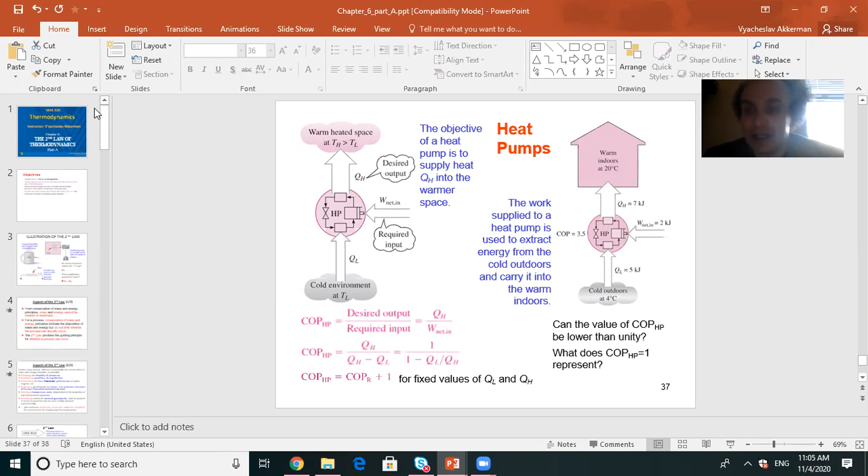Anyway, we are at second law, and I know this time, this homework, we spend a lot of time of theoretical and philosophical questions, but it's important. I do want you to understand what second law is, how it looks like, because first it looks like not very nice, not very convenient. But if you understand it, if you will be able to dive deeply in this, everything will be easy and self-consistent. Please realize it, okay?

So that we started. Last time we introduced second law, and I told you there are many ways how you can deal with it. Please realize second law is something in between juridical and physical law, right? It's something that you may not but won't violate. And I tell you how you can consider it. This law has never been proved, right? It has never been proved

experimentally or theoretically, but you know it exists. It's empirical fact, and you know if it would not work, nothing we talk about here would work in that case. So that's you may believe in it. And I told you how you can consider it. That when you are young, when you are children, people tell you don't do something and you don't do.

And ancient Greeks, whom I recall all the time, assumed that you cannot do something that gods or nature does not want to do. They assume that you cannot do what power cycle and refrigeration cycle do. They assume that you cannot convert heat into work. They assume that you cannot transfer heat from cold to hot source. They assume it's prohibited. That's a law.

But when you grew up, how our civilization grew up, you say, okay, I want to violate this. That's what nature desires, but I do want to do something that is not desired by the nature. People say, we do want to convert heat into work. We do want to transfer heat from cold to hot source, right? We do want this. And actually all our thermodynamics, all our industry and manufacturing is based on this. We say, we want this.

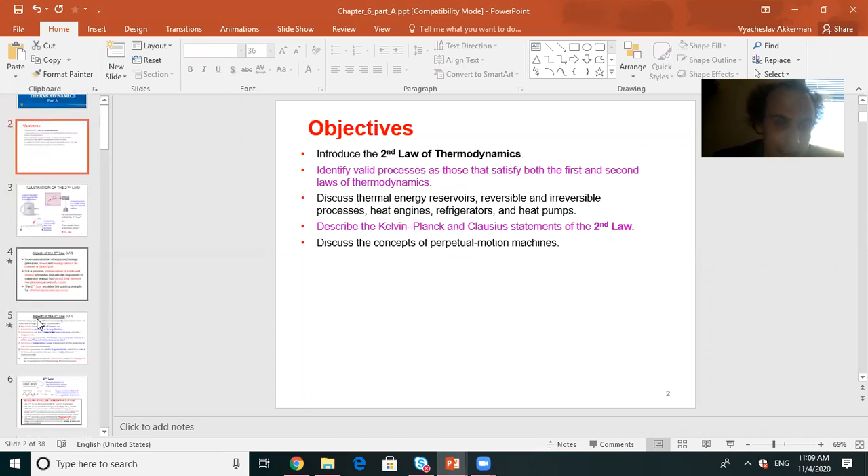Okay, let me continue. Do you see my screen, I believe? So far we considered two statements of the second law and demonstrated their equivalence, right? What are these statements? What we did last time — we introduced the concept and discussed different aspects. We say that the second law works only together with the first law. If the first law does not work, the second law does not work either, and there is no reason to consider it. In your homework, problem number 3, you should check first law and second law. Please realize, if there is no energy balance, the second law can give you anything — there's no reason to consider it. So the second law is supplementary to the first law, like a chain.

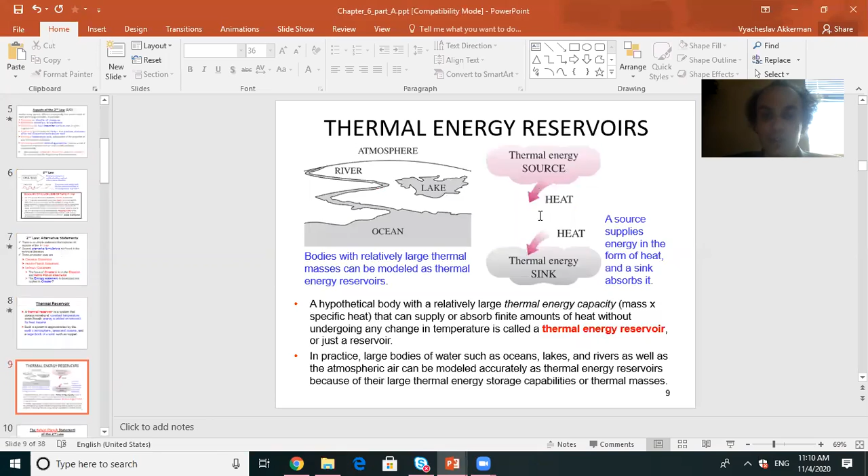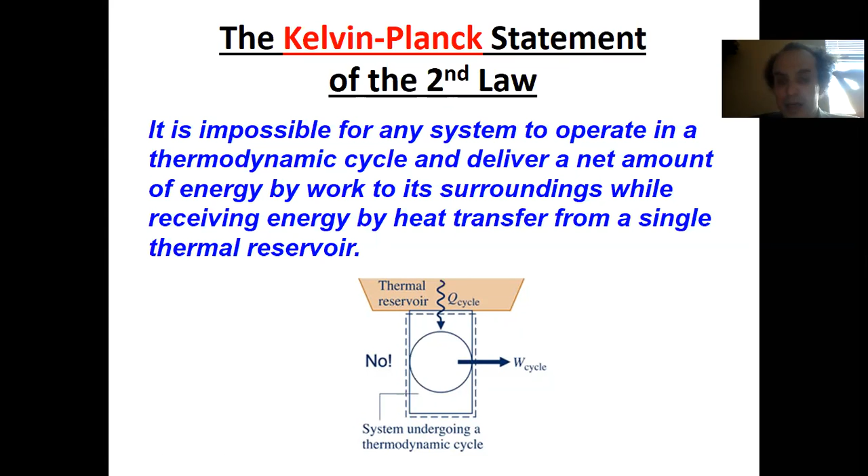And what we considered — we say there is the Kelvin-Planck statement. What does it state? It states that it is impossible for any system to operate in such a manner that it operates in a thermodynamic cycle and delivers a net amount of energy by work to its surroundings while receiving energy by heat transfer from a single thermal reservoir. Otherwise, it is impossible to have a heat engine operating with one thermal reservoir. You cannot convert this heat entirely into work — there should be another thermal reservoir here which will reject heat. It is impossible for any system to operate in a thermodynamic cycle and deliver a net amount of energy by work to its surroundings while receiving energy by heat from a single reservoir. Otherwise, it states that a heat engine cannot operate like this. To be more specific, a heat engine should have a second reservoir, right?

And remember what is a heat engine? A heat engine is a device which deals with heat energy conversion into work. You know that I can convert work into heat directly — it's easy, ancient Greeks knew this. But when I try to do the vice versa, I can do it, but I should have another reservoir and I will lose something here. That's the second law. And we considered also another statement.

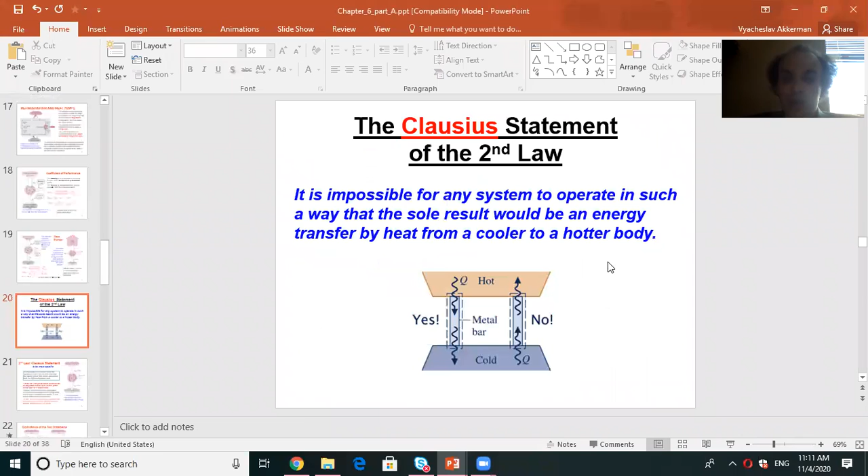How do we call it? We call it the Clausius statement. The Clausius statement talks about a fridge. It says the following: it is impossible for any system to operate in such a way that the sole result would be energy transfer by heat from a colder to a hotter body. Correct? Again, please don't say that it's impossible to transfer heat from cold to hot source — it's possible, your fridge does it, isn't it? But it is impossible to do it for free. It is impossible to have a system where heat goes directly from down to up and nothing else happens. Vice versa, it's okay — heat goes from hot to cold source, it goes to equilibrium, but not vice versa. You have some imposition of work, and that is the Clausius statement.

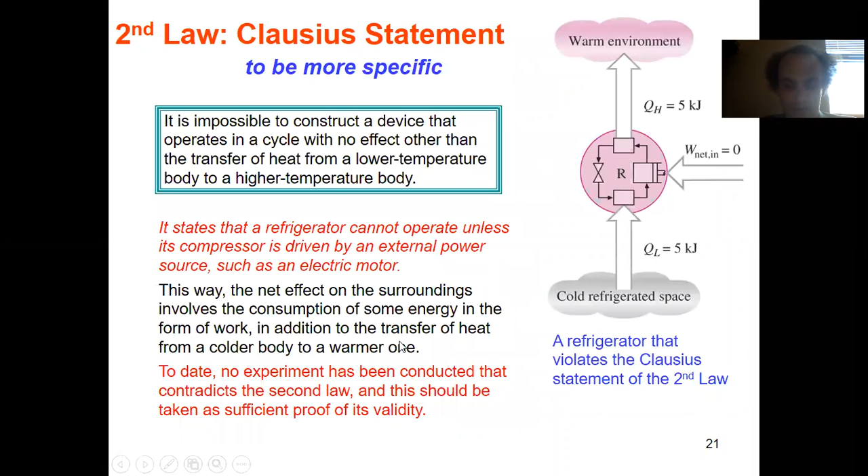Otherwise, it states that if you have a refrigeration cycle or heat pump cycle, if you have a fridge, your fridge does not work for free — your fridge needs a power supply. Do you understand this? It's impossible to be like this. Do you understand what I'm talking about? No questions yet at this point? I hope so.

Now, no questions? Okay, very well.

At this point, let me do the following — let me briefly recall what thermodynamic cycles are and what cycles we are considering, because we actually started talking about cycles in chapter 2, right? We say, what is a cycle? It's when you start from one point, go through other properties, and come back to the same state — it's a cycle. And we considered what we do in thermodynamics. We do two things that ancient Greeks did not know: we consider power cycles.

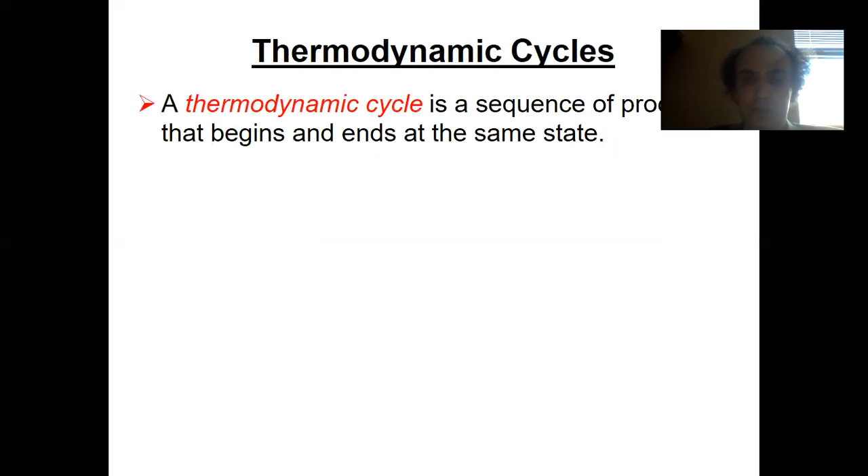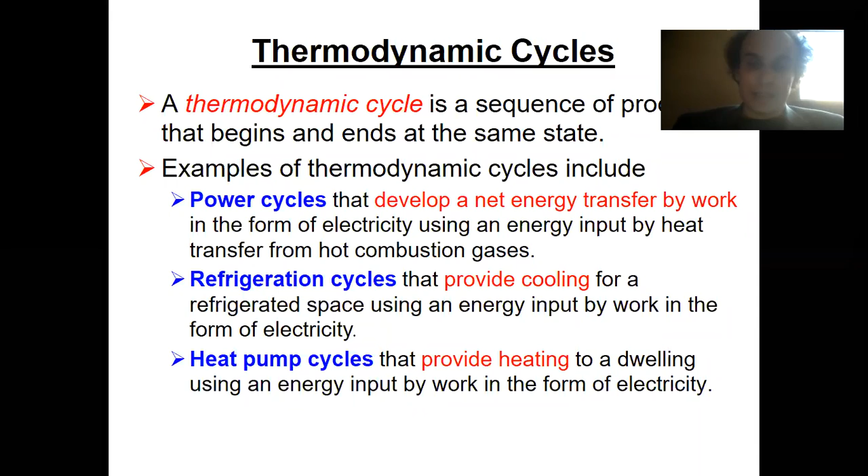What is a power cycle? It's a heat engine - a device which converts heat into work with some losses. And we consider refrigeration and heat pump cycles, which actually do the same. They are conceptually different from the goal, but they do exactly the same. They transfer heat from cold to hot source, and they take some penalty from you for this, some external power.

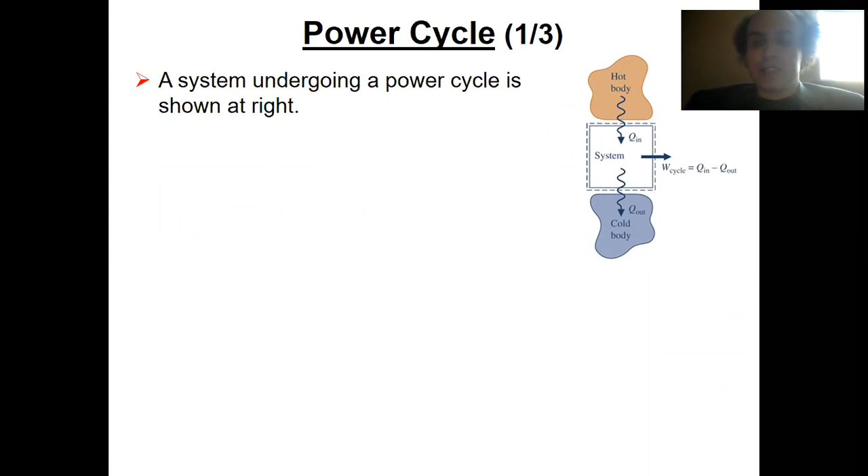So what is a power cycle? How does it typically look? It states that you should have two reservoirs - a hot body and a cold body. Heat goes from here to here. What second law gives you, what the Kelvin-Planck statement gives you, it says that you must have this second reservoir.

Here, work of a cycle will be net energy transfer by work. Q in, what goes in, Q out, what goes out. Does it make sense? Any question about this? And energy conservation looks like here, like you see on the screen now. That is your energy conservation.

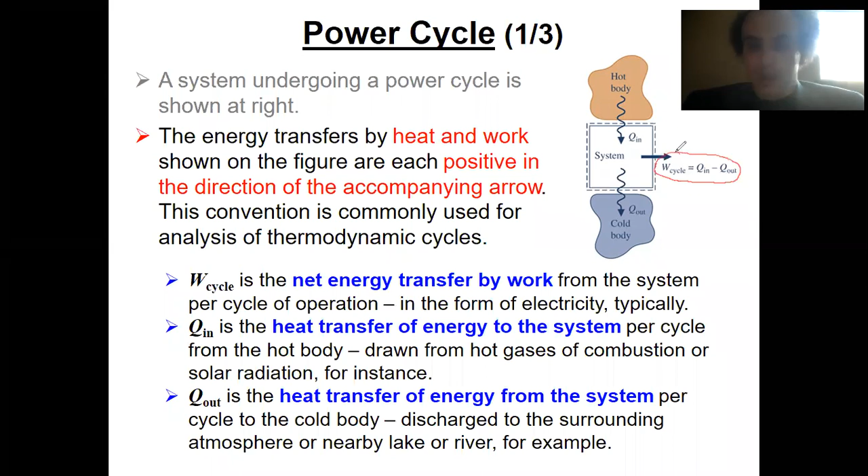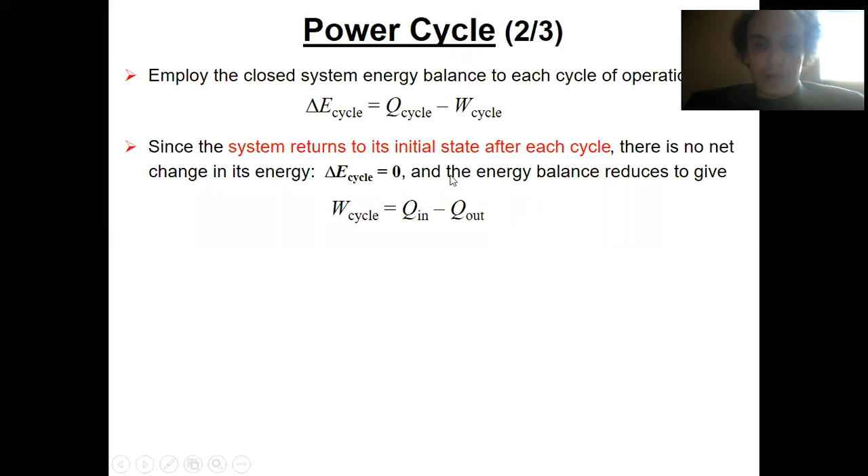So that will be your energy conservation. And if you do a cycle, delta E of a cycle will go out. So work of a cycle will be Q in minus Q out. It's still energy conservation. Now, in this device, remember we talk about thermal efficiency.

What is thermal efficiency? What is the efficiency coefficient? How do we determine it? It's desired over required, right? Take what you desire, divide by what you require. You desire to eat an apple, you require an apple in an envelope. So take desired over required.

So if you talk about a power cycle, what do you desire? You desire work done over the cycle, correct? What do you require for this? You require heat input. The ratio, that's basically what you see here. These are the basic equations. Well, the last equation is just a transformation, but that's what you have.

That is your equation. And what do you know about the value eta? From chapter 2, you remember that this value eta is larger than 0 and less than 1, correct? And we knew this because definitely you cannot produce more energy than you consume.

You cannot generate energy. But now what do we know? We know that you must have Q out. You must have this value, right? Why do you need to have it? Because of the second law. So actually what you will see now is that your value eta will be less than some maximal value, which will be less than 1.

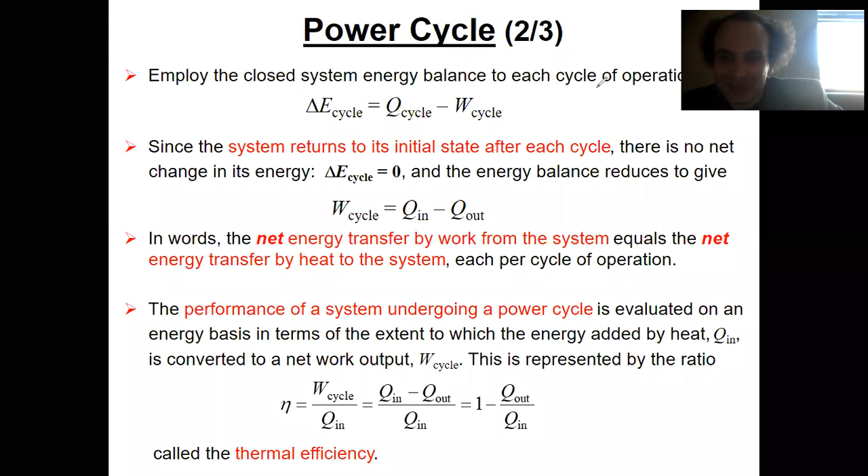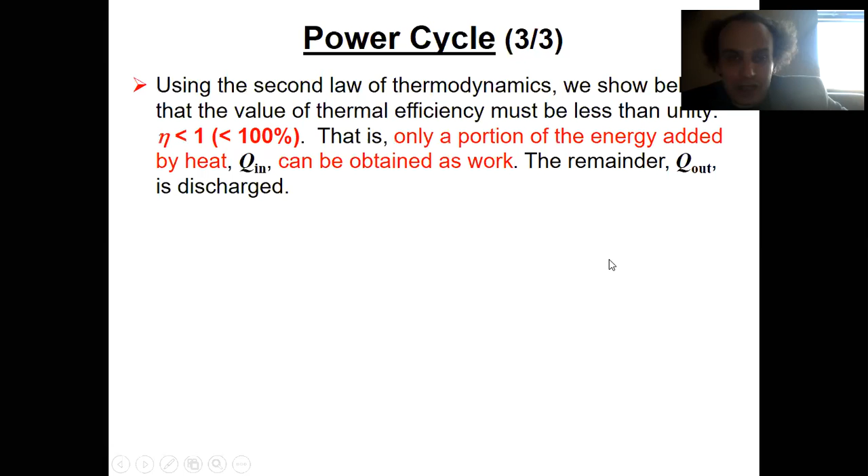So that's what we considered, and that's how the Kelvin-Planck statement looks like - you need to have another reservoir. For example, if you have a power cycle, let's read this problem, for instance.

Let's say you have a system which undergoes a power cycle, and this system receives 1000 kilojoules from a hot reservoir and discharges 600 kilojoules to a cold reservoir. So the question is, please find what is the net work developed and the thermal efficiency. So how should we proceed with this?

So basically that's what you have. You have two reservoirs. I can plot it here. You have a hot reservoir with temperature TH, which is 500 Kelvin. And you have a cold reservoir with temperature TL, which is 300 Kelvin. And you have a heat engine between them. That is the scheme that people will be asked to draw.

So what happened? From TH here you have Q in, or let's say QH - I can call it QH, I can call it Q in. What is this? It's 1000 kilojoules here. That's what I get here. And it is stated that it will be converted into work output.

Okay, but you must have this reservoir. Something here will be lost. So here, some amount of QL will be lost. Do you understand this?

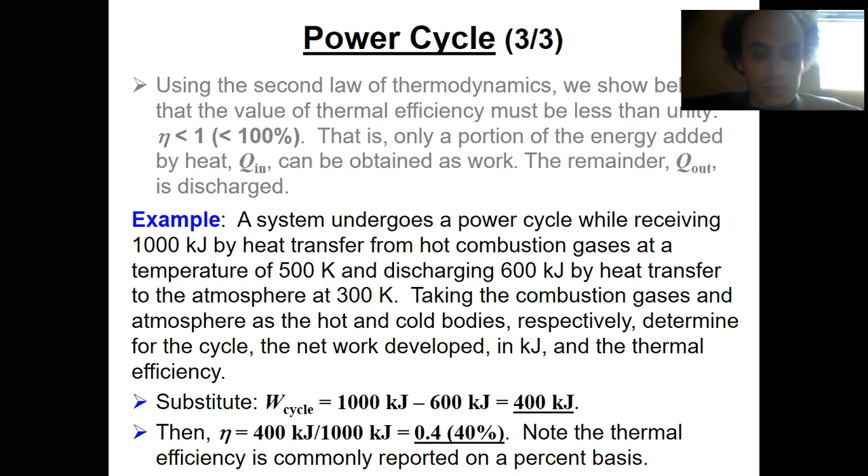So in your particular case here, what will it be? You will say that work over cycle will be QH minus QL. It will be 400 kilojoules. And thermal efficiency will be this work over cycle divided by total heat. It will be 40%. Does it make sense? Do you understand this point?

Okay, so that's power cycle. And basically, if you look here, again I show you the equations that you may see. So here, before this point, you have actually four things to figure out - you have two equations and four variables. That's what you need to find.

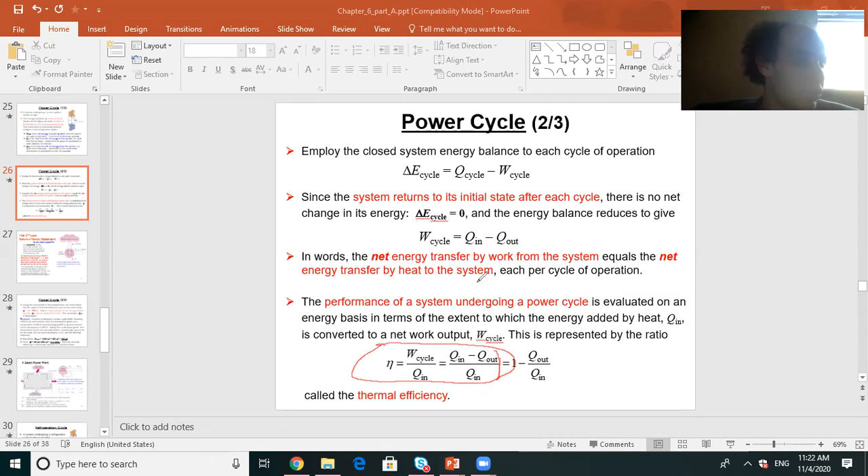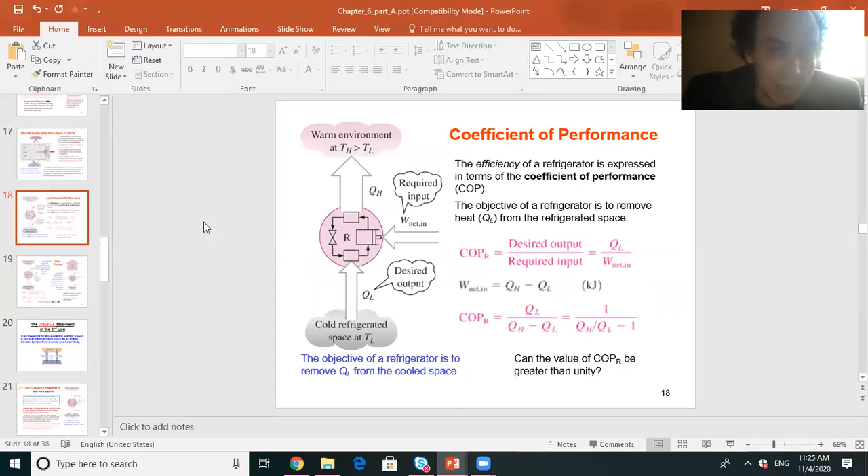Let's talk about the refrigeration cycle. So refrigeration cycle and heat pump will come after this - it's something similar. And also you should recall the power cycle examples we considered last time in class. So basically that's what we considered in class. Where is it?

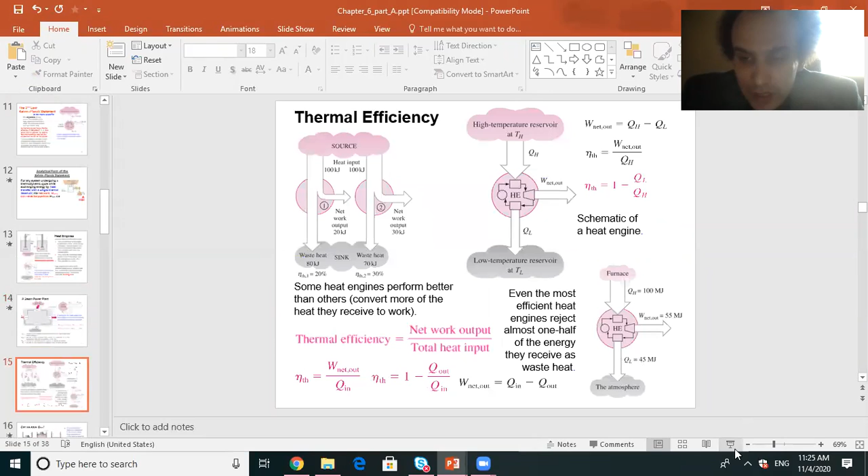So we considered efficiencies, and there is a good example, 6.1, 6.2 in your textbook. If there is a heat engine here, 100 kilojoules comes in, 20 kilojoules is converted into work, 80 kilojoules goes into waste, into the cold reservoir, you may easily find your efficiency. It will be 20 over 100, so 20%. In the second engine, 30 kilojoules is converted into work, 70 is rejected, so your efficiency will be 30%. It makes sense, right? So definitely the second heat engine is better than the first one. And still your eta is less than 1.

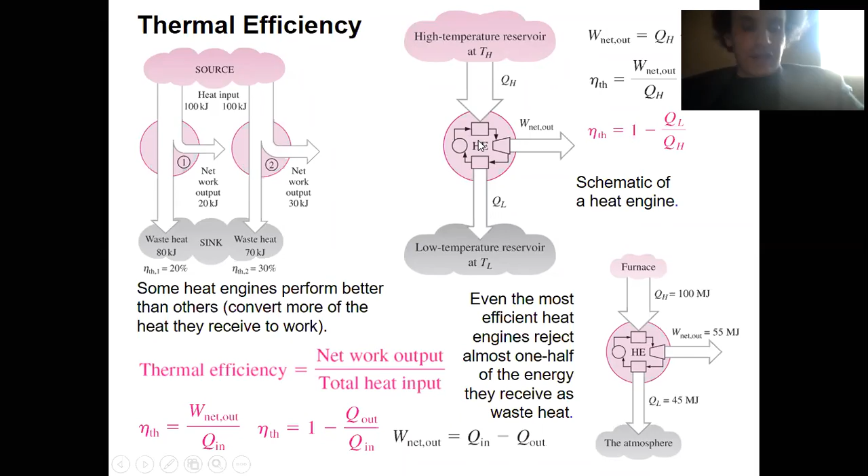That's what you remember. Now let's forget about this and go into the refrigeration cycle. I recall the purpose of the refrigeration cycle is different. It does not convert heat into work, it transfers heat from cold to hot body. And it gets some tax for this, some money, some earning from you. It does not work for free. It cannot be like this. You need to deposit some work input.

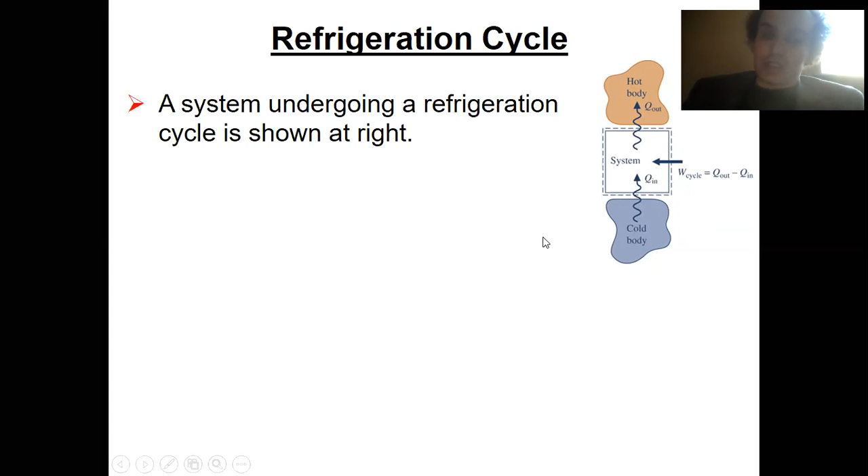So as before, what you should realize is, work over cycle, if you talk absolute value, it's okay, but from the point of view of refrigeration cycle, it will be negative. Please understand it. So Q in will be here and Q out will be out, right? So what you will have here, I will write that Q out will be Q in, if I talk about absolute values, plus work over cycle, correct? That's your energy conservation, that's your first law. It should work. If first law does not work, no reason to talk about anything else.

And now we talk about coefficient of performance. No, we don't talk about efficiency, we talk about coefficient of performance. Why is it not efficiency? Because it may exceed 1. So what is the definition? It's exactly the same. What do you desire and what is required here? We will say that coefficient of performance, or we call it beta for refrigeration, what do you desire from here? You desire the heat which goes from here, which we call Q in or Q L, because L sometimes, it's like lower temperature. And what do you require? You require work over cycle.

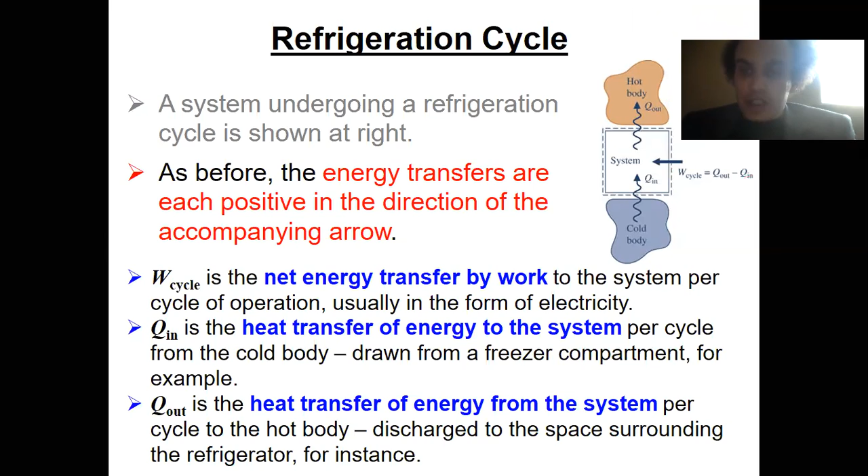That will be the coefficient of performance. And please remember, this value can be less than 1, but it can be larger than 1, unlike eta. No problem for this value to be 5 or 10, because that is your coefficient of performance. Look at this point, what is it? It's Q in over work over cycle. Imagine I ask you to bring 1 ton of material to the 8th floor. You can do it if you have a good elevator or good cart. Even your own mass is 50 kilograms, you weigh 50 kilograms, but you can bring a ton. So your coefficient of performance will be 1 ton divided by 50, which is 20 times, right? And it's okay, do you understand?

The only thing you should realize here and remember is the following: this coefficient should not be infinity. The work over cycle, this work input, should be finite. It cannot be 0. If it was 0, it will be infinite, beta will be infinite, but according to the second law, you must have it. Do you understand this? And that's it.

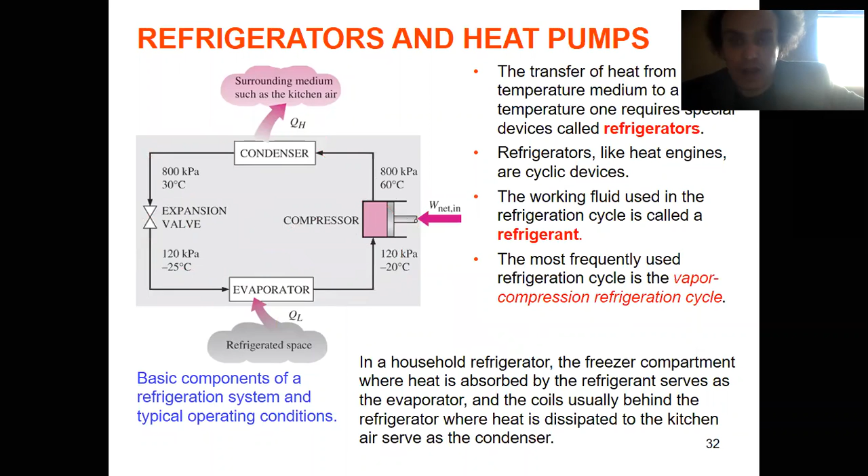Okay, and why do we say it? Because that is actually what you see here, what was desired over what is required. Coefficient of performance, we call it beta, is desired over required. That's what I discussed a couple of times.

But key point, if you see the difference between heat pump and this one, here is what you need. In this problem, you don't care much about QH, right? You don't care much. You care about QL because you care about the temperature in your fridge. You don't care about the temperature in your kitchen. You care about this. That's how it works.

Otherwise, you can also write it like QL over work input, right? So basically here you have four unknowns, and four variables, and two actual equations. You need two of them to know the other two: QL, QH, and this value. Does it make sense for you? You need to know two of them to find the other two. Again, this value can be larger than 1, less than 1, but definitely it's positive.

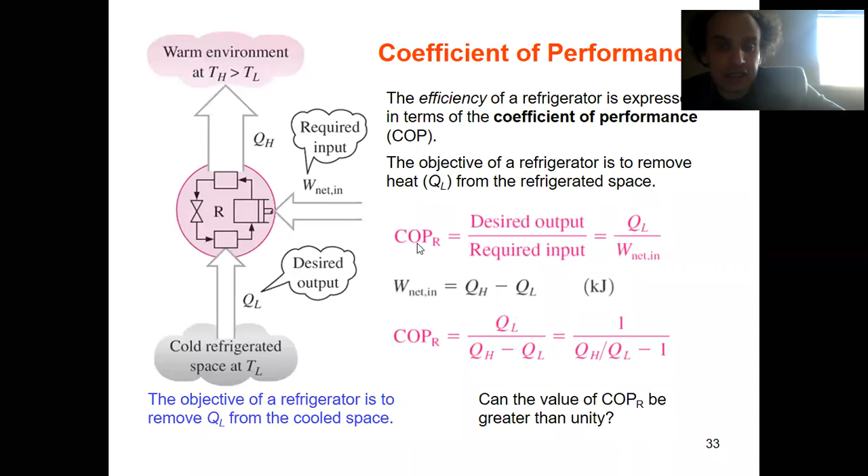And again, the Clausius statement says nothing but that there is no system. It is impossible for any system to operate in such a way that the only result would be energy transfer from cold to hot body. I encourage you, in the exam, the key point here is the sole result, the only result. Don't state it without the word 'sole.' Don't say it's impossible for any system to operate in such a way that the result would be heat transfer from cold to hot source. That's wrong. Your fridge does it.

Ancient Greeks assumed it's correct, but we know it's wrong. But we know we should pay a penalty according to the second law. And that's really important. That's something you must remember, right?

Okay, very good point. Why do we use subscript H and L? That's a good point, because in different books you have different subscripts. I will tell you. Typically we use H, TH, because H means hot. You have hot reservoir, hot body. So subscript H means hot, and sometimes this Q which goes here, we call it QH.

It can be Q in, Q out, it will still be QH. From the cold body, sometimes we call it Q in, but sometimes with subscript TL. We also use subscript L, which means lower temperature, or sometimes TC, where C means cold. So it may be hot, or high temperature, that's why subscript H. And subscript L means low temperature, and subscript C means cold.

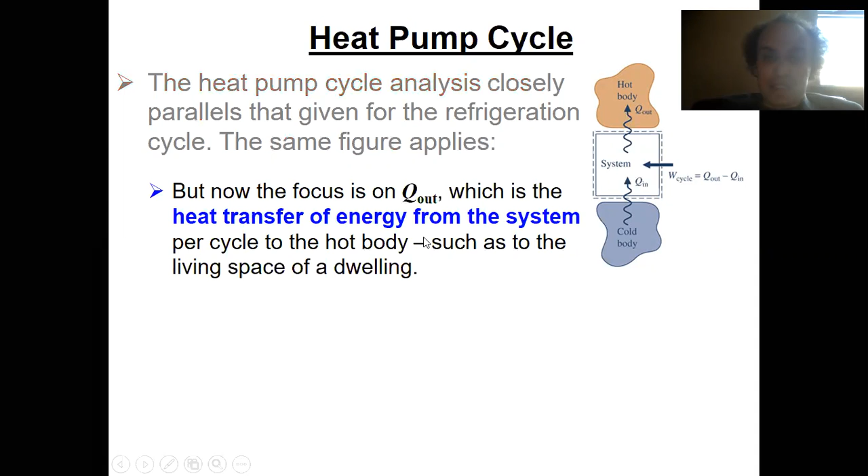So for heat pump, what you desire is actually QH, or how we call it, Q out. And now you may realize why I put QH, QL, because Q in and Q out change from power cycle to fridge cycle, but QH and QL have the same destinations. So basically, that is it. Heat pump does exactly the same thing, it can be the same device which works as a heat pump, but the coefficient of performance will be different. So again, the same story.

For a power cycle, you have this equation, it will be energy conservation. But coefficient of performance for a heat pump will be what? It will be Q out, QH, divided by work over cycle. Do you understand this? I can also write it like here. It will be actually QH over QH minus QL.

And that is important, why is it important? That is really important. So you may realize now that for a fridge you had QL here, now you have QH. And this value is definitely larger than 1, we call it gamma. So for heat pump, coefficient of performance is definitely larger than 1. Because when I ask you to bring something to its floor, what you will bring will be what you pick up here plus yourself. This is definitely larger than you, otherwise you would just jump for free.

But again, this value is not infinite, it should be finite because work over cycle is finite. So that's the difference. Please realize the mechanism of work is still the same, because I tell you, in thermodynamics there are two principles: converting heat into work, and transferring from cold to hot source. But we distinguish heat pump and fridge because of the goal, how they work. So basically that's what you need. For heat pump, like refrigeration, that is what you desire, that is what you require. And that is the ratio.

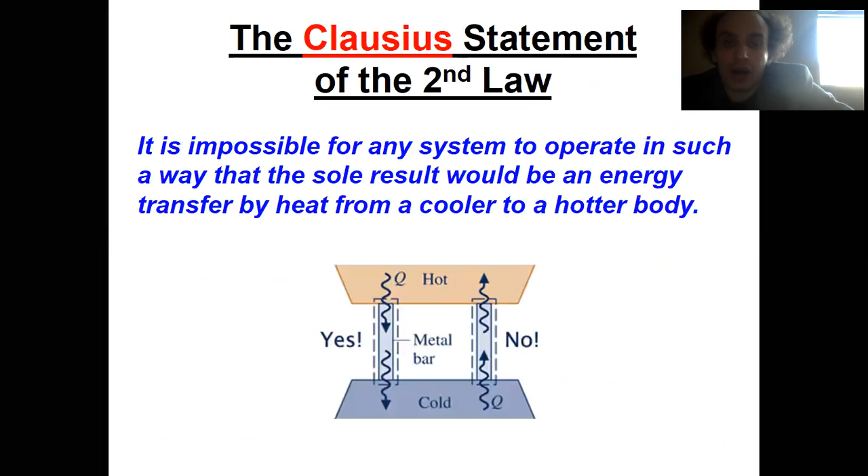Okay, so let's consider an example, you have a similar example for refrigeration cycle and for heat pump in your text. Let me see here... Yeah, in your textbook you have example 6.3 and 6.4. They are good examples which show you how to calculate efficiency. You can go through these examples, and the same in your homework, it will be problem 5 and 6 when you consider it. And when you consider heat pump, you should be able to zoom it out and consider it separately, that's problem 5 and 6 from your homework.

So basically, here it is, let's see. For instance, I have a heat pump working like this: I have QL, which takes 5 kilojoules from outdoor, from the street. And my heat pump works such that it consumes 2 kilojoules, so that 7 kilojoules is delivered to my room, to my apartment. So the question is how it works. Definitely you have conservation, that 5 plus 2 gives you 7. What will be the coefficient of performance of this device?

We consider, what do you want from it? You want QH. What do you require? You require work input. What is the ratio? The ratio is 3.5, so coefficient of performance will be this one. While you may realize that if you talk about the fridge, it will be this over this, it will be 2.5, it will be less. This is the ratio between efficiencies, or coefficient of performance, for heat pump and refrigeration cycle. Does it make sense for you? Do you understand? I hope so.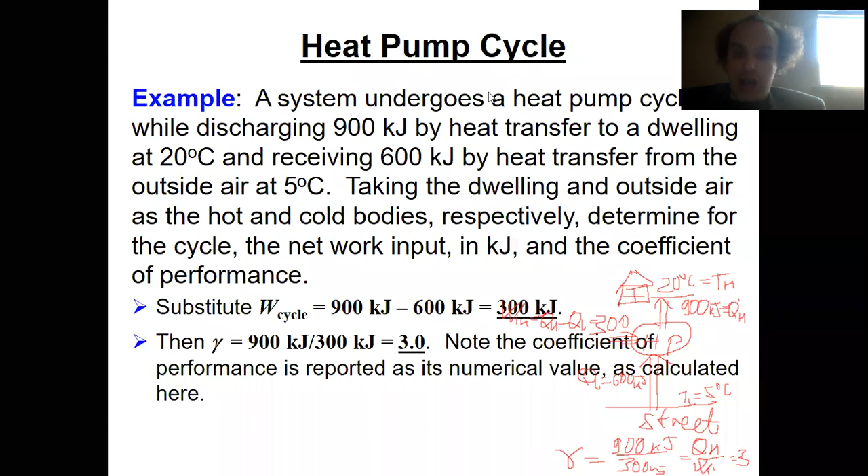Any question about heat pumps? Do you understand this? So that's what we discuss. And basically in more detail, in fact, many of these things I discussed in my recorded lecture last time, but here we considered it in more detail, right?

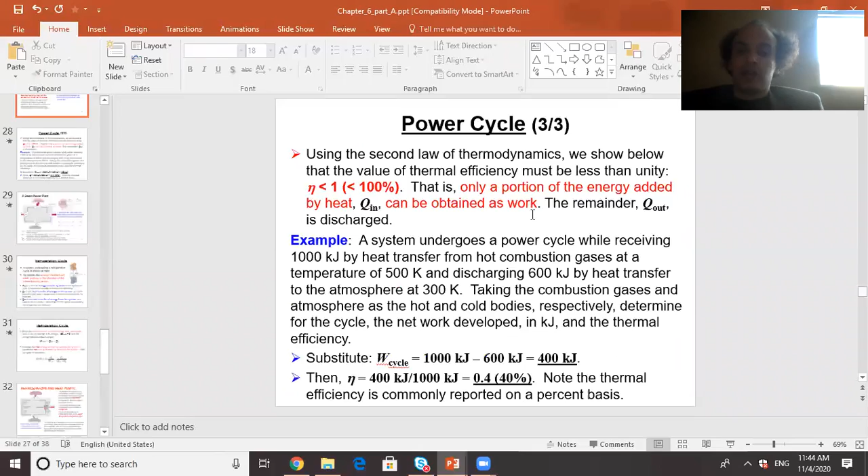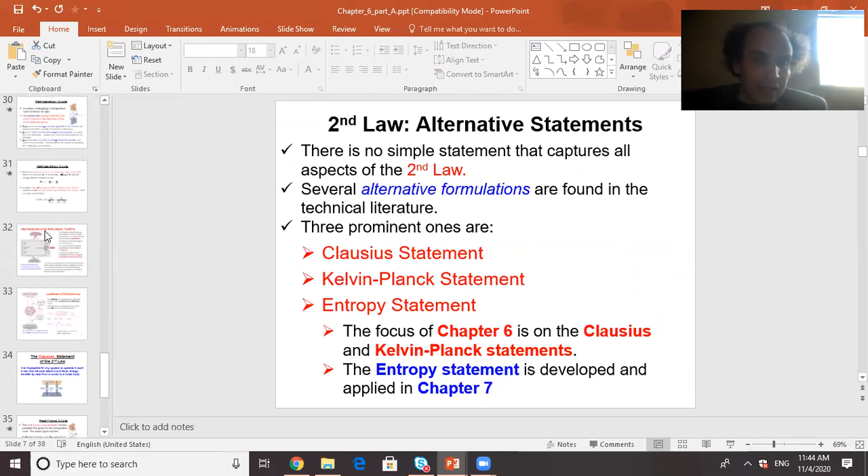We still have several more minutes, and then we also remember what we proved. We proved that actually - so we have two statements, Kelvin-Planck and Clausius, and remember last time we realized that they're equivalent. We managed to demonstrate it, we managed to obtain it, and we observed that they are equivalent. We proved it, right? Remember through this, we demonstrate equivalence. So if the Kelvin-Planck statement is violated, then this statement is violated.

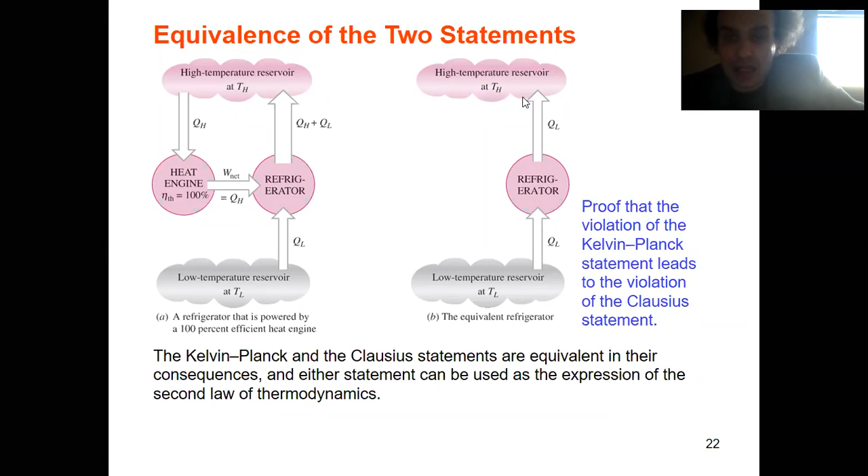What is the advantage of knowing gamma? Well, coefficient of performance - that is the measure of your heat pump, how good it is. Because the larger the gamma, the better it works, right? And when you, so basically again, you consider two values. That's what you need if you talk about heat pump.

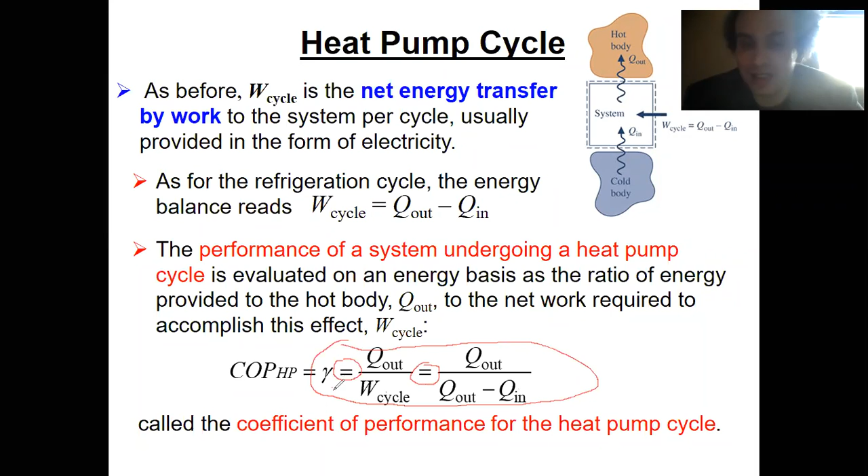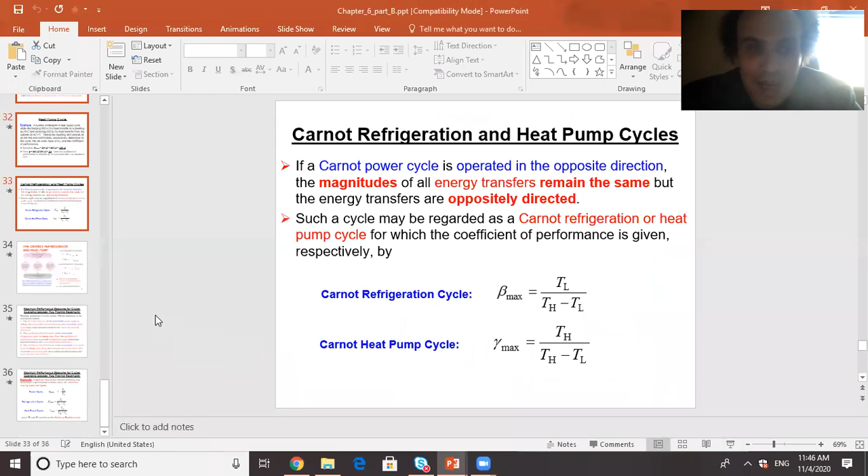Like I can tell you, why do you need to know that your engine has efficiency of 30%? It's a measure of how good it is, right? So that is a measure of your heat pump or refrigerator. Okay? Now, so that we considered. So now I believe you have a basic qualitative understanding of the second law. And what you will do next, it will be quantitative understanding, which is more important.

Because we should quantify it. It would be a measure. What I tell you, the second law tells you what penalty you pay, so we will measure it. Now you know that you should have a second reservoir, you should have work input. Now you know that you must pay some penalty. So here we'll discuss what kind of penalty you are paying.

Is it ever possible for QH to be larger than QL for a refrigeration cycle? In other words, can work ever be negative? The answer is very simple - I think you're a little confused. QH is always larger than QL. It is larger. QH is always larger than QL because work input is positive from the point of view of this. QH is work input plus QL. QH is larger than QL.

Now, you are saying very good things. What we talk about now, we talk about absolute values. From the point of view of your system, really, you would be right that work is negative.

So work is done on the system, it's negative. But when I talk about work over cycle, I talk about absolute value, like modulus value. So please check your formulas, I think you confuse QH and QL. Vice versa cannot be, because that would mean your fridge works for free, which is impossible.

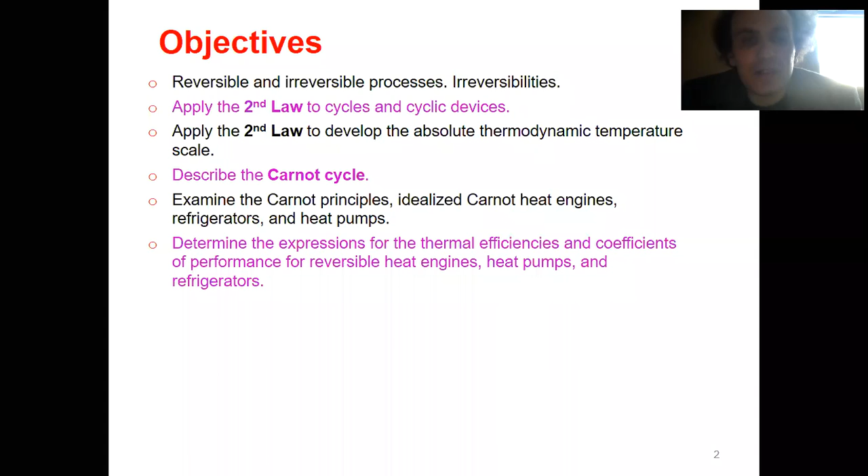Now what we do next, we will talk about how to measure it, and that measure will be irreversibilities. Most of the processes we have in our life are irreversible. When you melt sugar in tea, it dissolves. When you convert heat into work, it's done, it's gone and you cannot get it back. So the process which cannot go backward, we call irreversible.

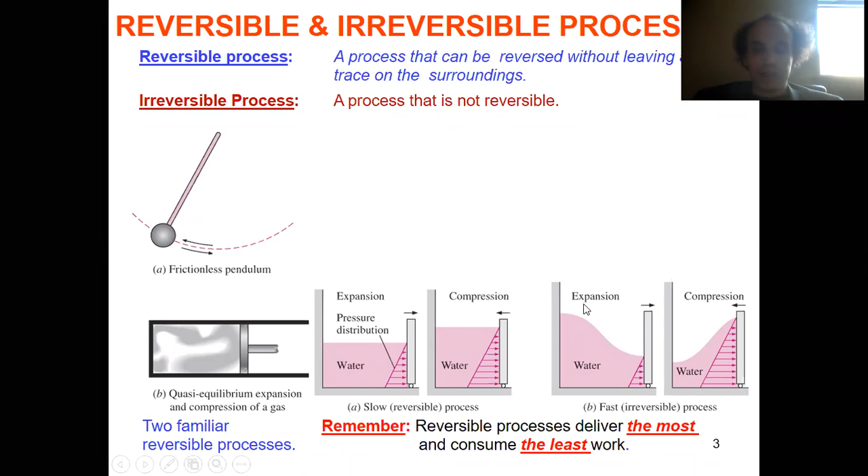A hypothetical reversible process is when a process can go back to the same trajectory. For instance, a frictionless pendulum looks like it will ideally be reversible. If you have quasi-steady expansion, piston motion going back and down, it will be reversible. But typically, what we always have is irreversibilities.

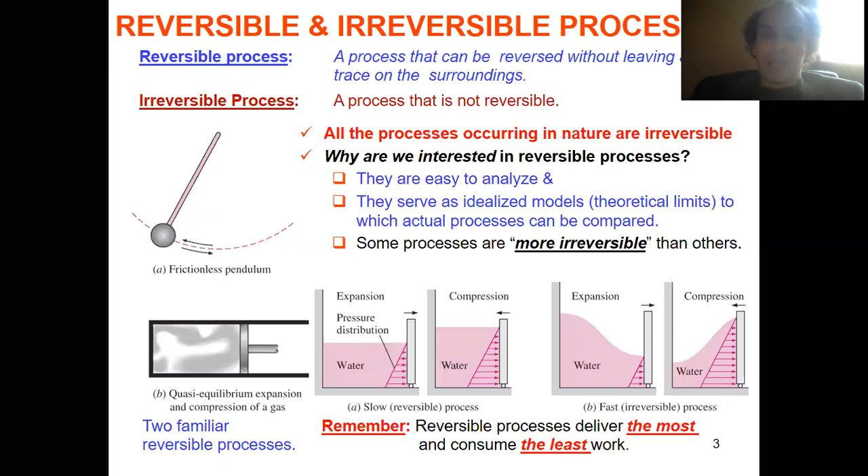We do have irreversibilities. And then you may ask, why do we consider reversible process at all? For two reasons. One reason: we want to see how far you are from ideality. Reversible is ideal for you. You want to see how far you are from it, how much penalty you pay, and then measure what your irreversibilities are.

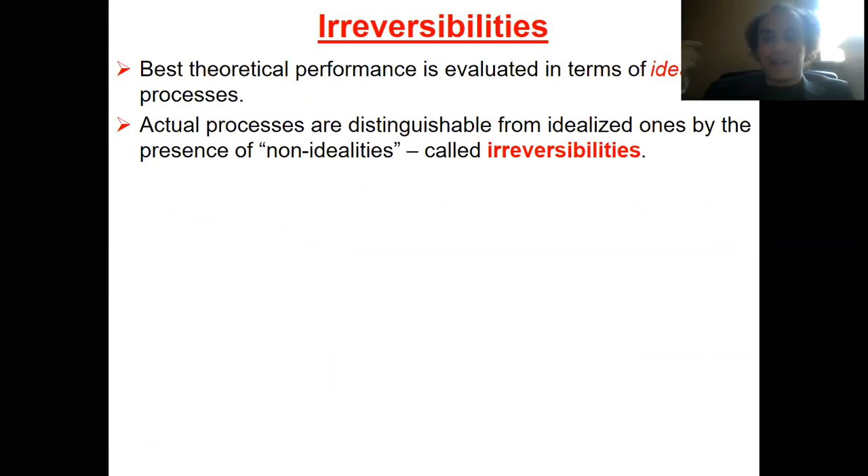So what are some irreversibilities? These are non-idealities, items which make your process irreversible. What are examples? If you have heat transfer over finite temperature difference, you cannot convert heat into work entirely, it's irreversible. Unrestrained expansion, chemical reactions, spontaneous mixing - if I have separate oxygen and nitrogen, they get mixed and I have air. Can I get it back? No. Friction - if I have friction, I dissipate, which converts my mechanical effect into friction.

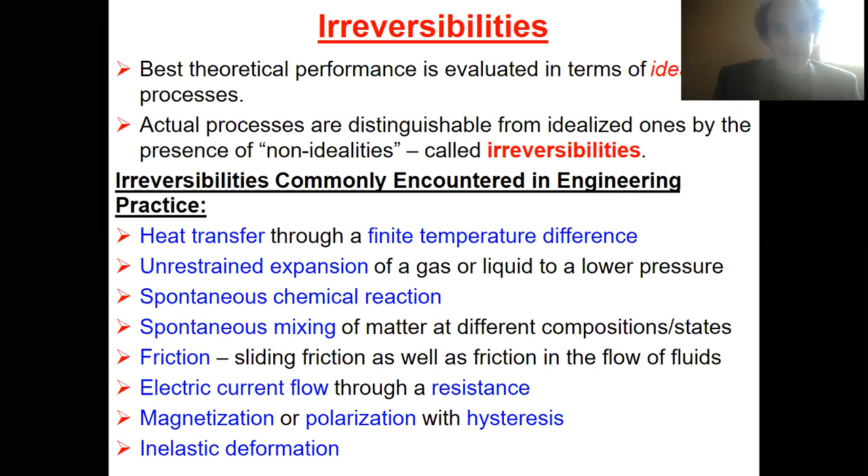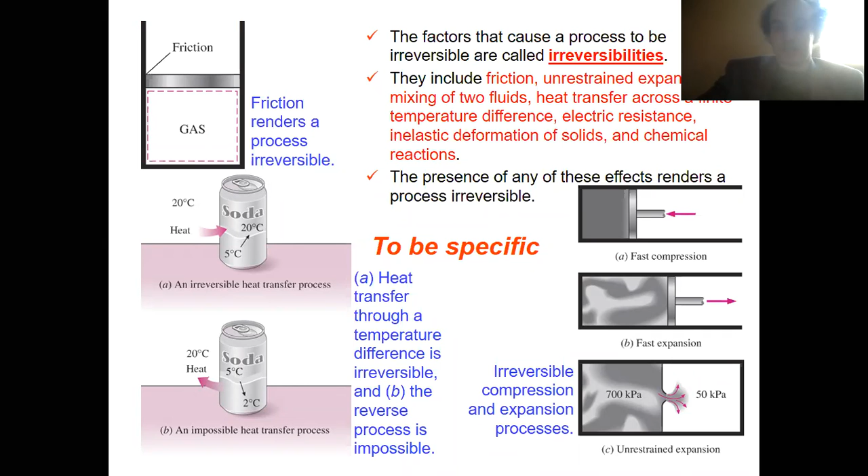Into viscous heating. Electrical and magnetic field, inelastic deformation - typically in class I take a piece of chalk and crush it into pieces and say I cannot connect it back. It's an inelastic deformation, I crushed the crystal structure. All these items are irreversibilities. Later when we talk about entropy, entropy will be a measure of irreversibilities, so you want to know how irreversible the process is.

At this point, you may see that reversible process is fully idealized, irreversible is not idealized - and how irreversible can you be? You may say it's just irreversible, not ideal, and irreversible will be less effective than reversible because it involves bad things like dissipation. But if I ask you how irreversible you are, you don't know what to say, right? You cannot be half pregnant, half dead, half alive. You may be half healthy, half smart, but you cannot be half dead or half pregnant.

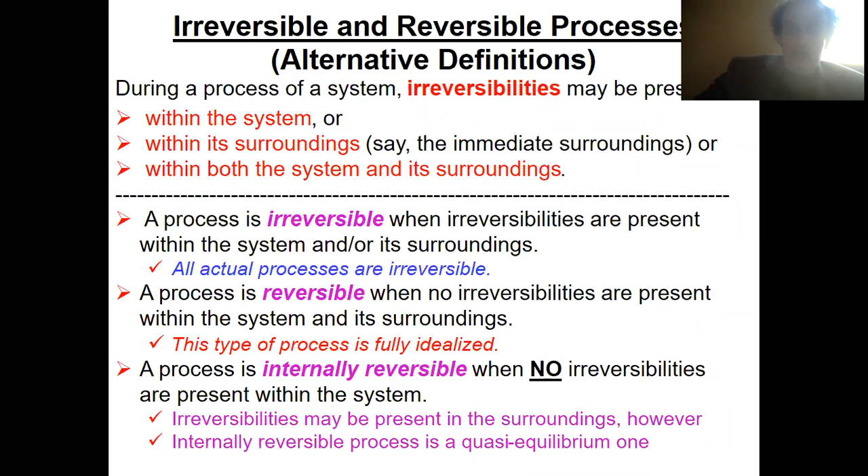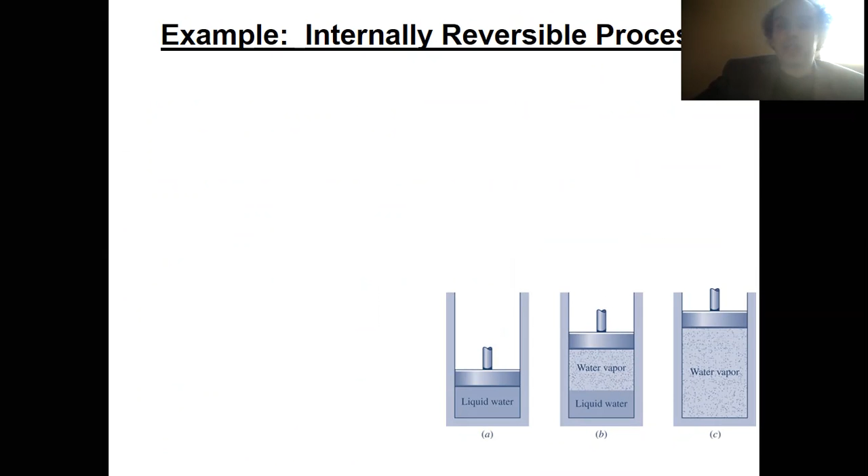So you want some kind of measurement, you want to measure irreversibilities, some formula to measure it. That's what we are going to do in the future. I will finish at this point, but I want to show something: there are internally reversible processes and externally reversible processes, and I'll show what that is.

Let's assume I consider a system like this: I have a tank with water, it's closed, and I will take this tank of water into the fridge. It gets frozen. Then I put it on an appliance and it gets reheated. Then I put it back to the fridge, it gets frozen. Then put it on the appliance, it gets reheated. And I can do this 100 times.

If I am a molecule in this tank, what do I feel? I feel the same process back and forward. So from my point, this process is reversible. But if I'm the guy moving it back and forward, will I see it as reversible? No, because your appliance and your fridge take some effort, so it will not be reversible.

We call this process internally reversible - it's internally reversible for a system, and this process exists in practice. While there are no real reversible processes, there are internally reversible processes in practice, and they're better than internally irreversible ones.